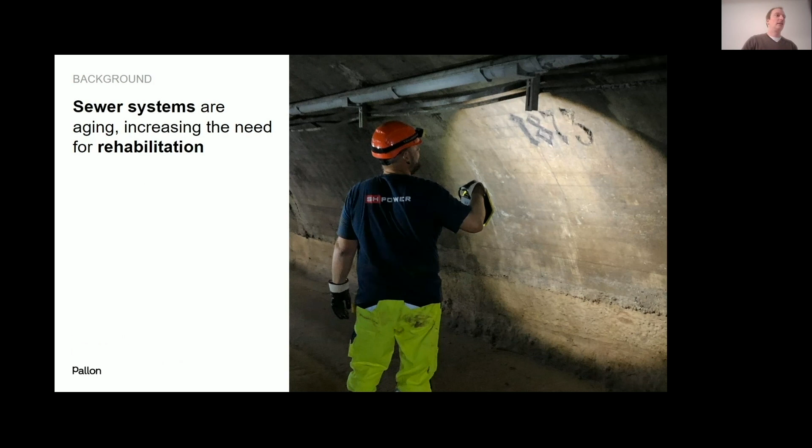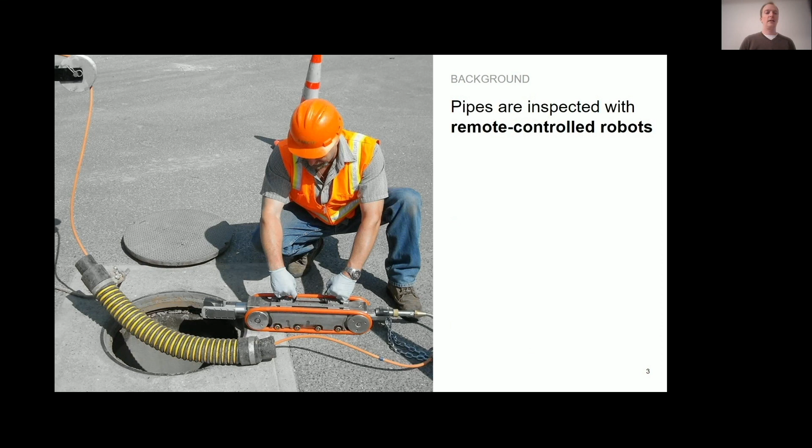Let's start with a little bit of background. As you know, sewer systems are aging, and this is increasing the need for rehabilitation. Sewers also need to be inspected, and currently this is done with remote controlled robots, most of which have a camera attached to them in one way or another, and then a manual operator reviews the footage coming from the robot.

As you can imagine, this is very tedious manual labor, and it's not only a lot of work, but the people who can do this job, the specialists able to conduct these classifications and defect codings, are very rare. That's why we thought there's a big opportunity here to come in with computer vision and machine learning to automate elements of this process. So that's the background and the setting in which we operate.

Now I brought a few examples of how we use computer vision and AI to help this process. First, an example where we use pose estimation to increase image quality. On the left, this is coming from a 3D scanner - you see the original image, and on the right you see ours, which is a lot less distorted because we also use pose estimation to increase the quality of the image.

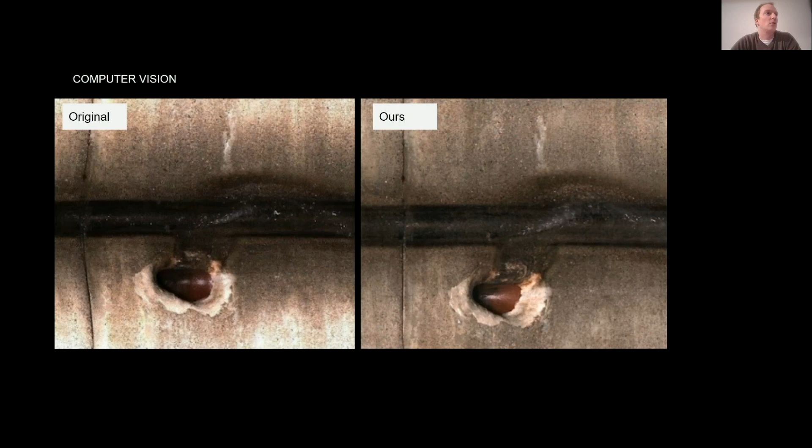The second example here: on the left you see that the lens was dirty, and on the right you see what we were able to do with smart stitching of images, using images where the water drop on the camera is not being seen.

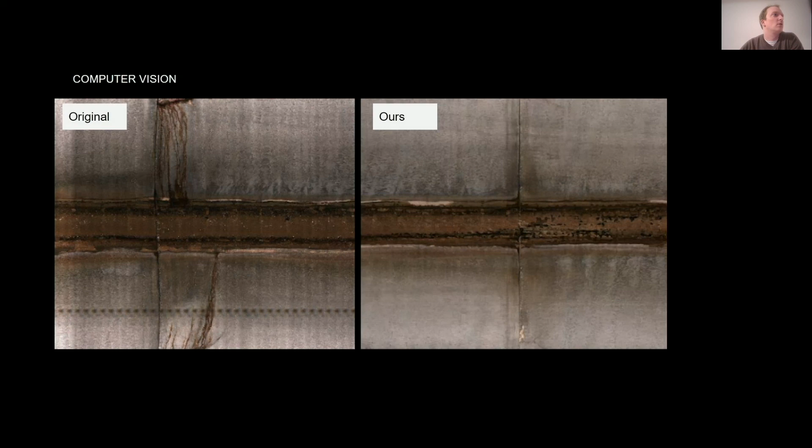The last example around more advanced computer vision algorithms is where we use camera pose estimation to generate a 3D reconstruction of the pipe. This can then also be used for measurements and many more elements. So these were a few examples of where classical computer vision algorithms are used.

Now I will share a little bit about how we use deep learning, machine learning, or AI in our services. Here you can see a screenshot from our web app, where you can upload your footage and we then process it for you. I'll also talk a little more about the process steps later on, but here, just to walk you through this real quick.

On top, you see what you might even call a street view for sewers. You can move the camera left, right, up, down, back and forth, zoom in, zoom out, and basically move within this 3D reconstruction of the pipe.

Of course, this is only possible if the footage has been provided from a 3D scanner. And then on the bottom, you see the 2D view that we've also seen before, where you also see that we've added the defects.

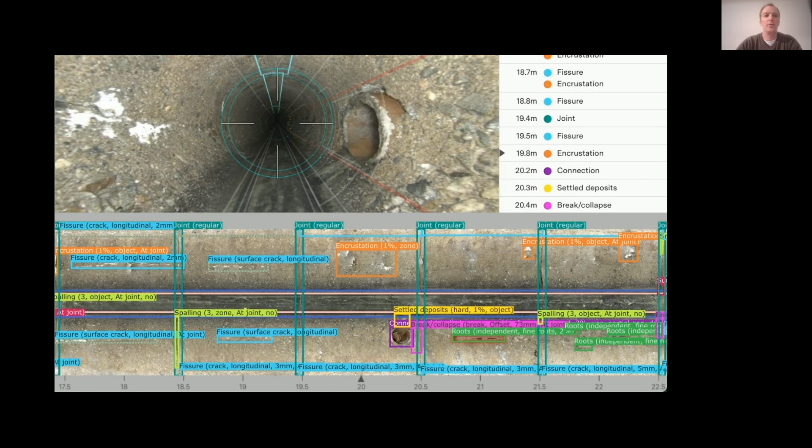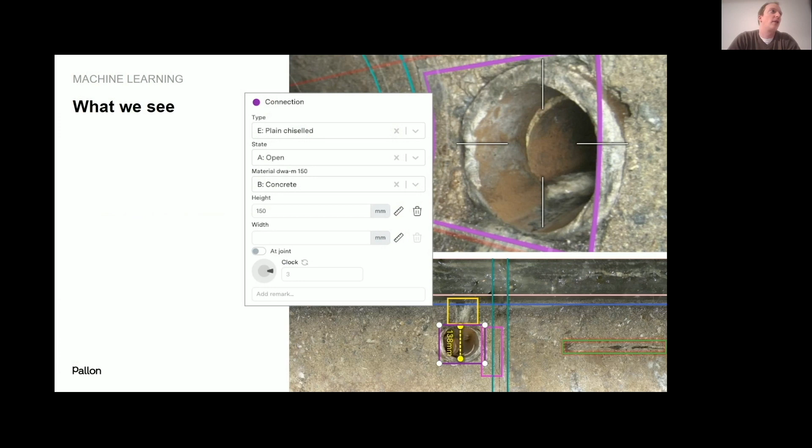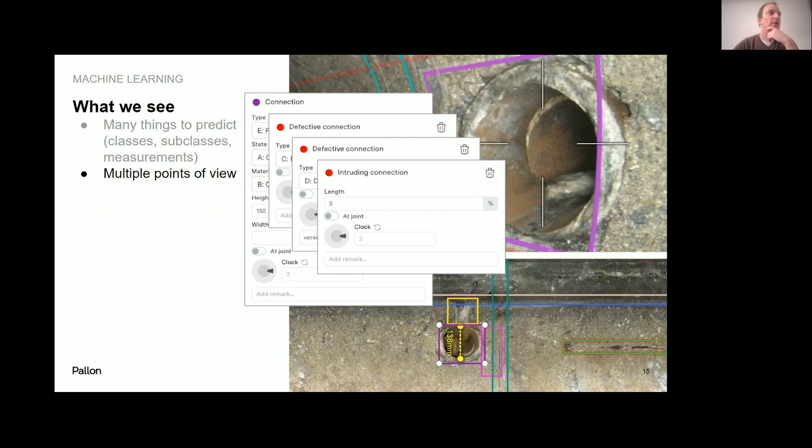And of course, these subclasses and measurements are not the only thing that make this hard, but also there's multiple points of view. So here you can see that this connection can be seen from multiple points of view in our app. And from all of these views, we have to give the correct estimate of the defect location and predict it accurately.

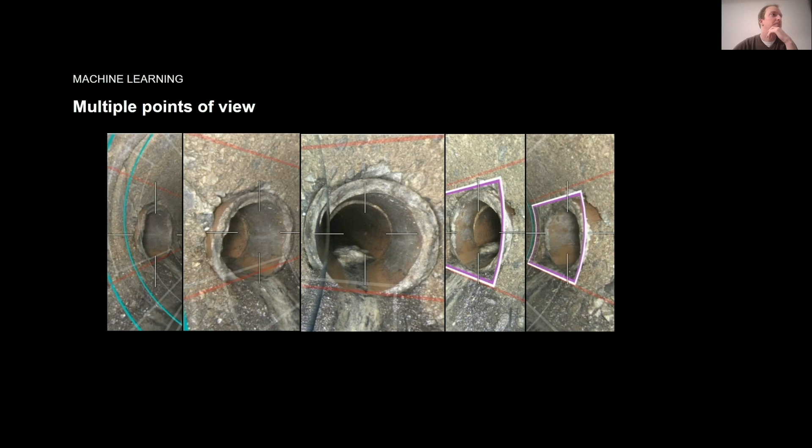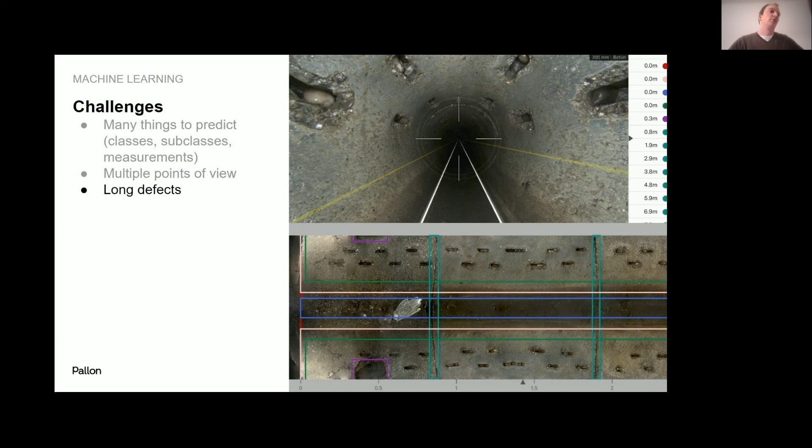Another challenge is that there are long defects that wrap and are continuous throughout the whole pipe. So we also have to find solutions how to display that correctly, and also how to annotate this correctly.

Just to close up this section around challenges we are facing, of course in every challenge there's also an opportunity. We are very excited about this, because there's lots of training data compared to other computer vision and deep learning fields of industry applications. We have lots of data comparably.

It's very interesting to deploy these solutions in this space because we also don't need to worry so much about timing, like an autonomous vehicle where we have to immediately react in milliseconds. We can actually redeploy solutions in a matter of days here.

And of course, we can also review uncertain cases again. So if we detect that our deep learning predictions are not as certain, we can redeploy a human quality check if needed, and then ensure highest quality for our customers.

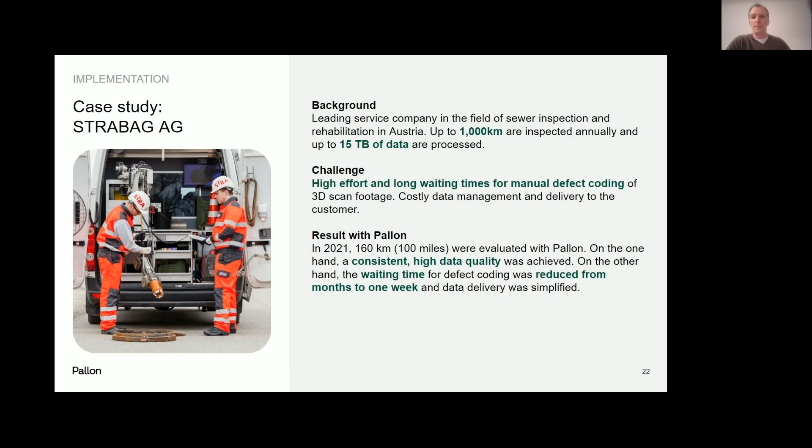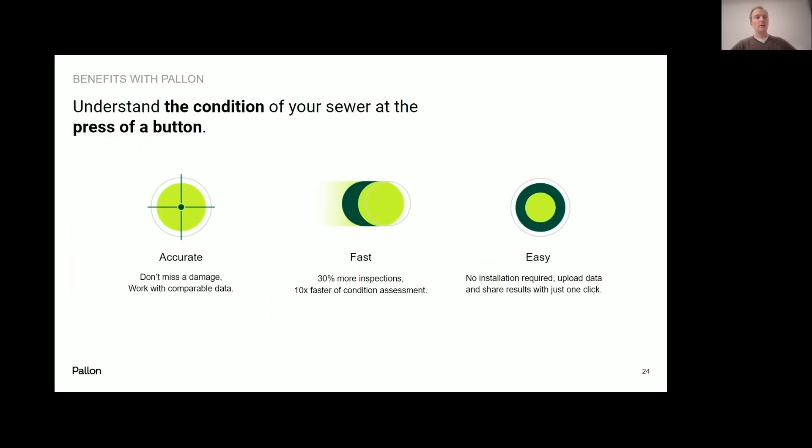Yes, and here are a few more words about from our customers. Of course, they like the precision in budget planning. It's a good foundation for the following processes. We also aim to keep our web app interface very simple and easy to use. And of course, accuracy is very important. So to quickly summarize it, we want to be accurate, fast, and easy.

And yes, quick words about our team. So we try to combine environmental engineers with computer and computer vision data scientists from leading universities, and that's basically already it. So if you want to know what we can do for you, feel free to check our services. And this was actually already it.

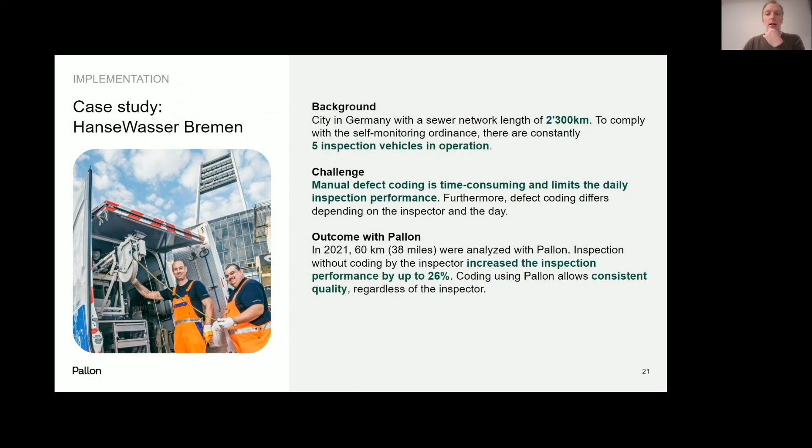And of course, the condition assessment is also faster because delivery times are quicker. But maybe I can expand a little bit on that. The cost savings here in condition recording and assessment are given for sewer network operators, and they get the cost savings I just explained. They also get higher data quality and data-based rehabilitation planning. Engineering consultants get accurate and reliable defect detections, and then they can focus on action planning, and they don't need to work on quality control, so they can improve their margin and work faster.

Also inspection companies can use hardware and their staff more efficiently because they don't need to do the on-site coding. So we saw numbers up to 30% more per day. And of course, they also get a consistent quality for their customers, because it's not dependent on the individual inspector, but it's always the same objective, fast, and high quality data annotation they get. Thanks, and talk to you soon.